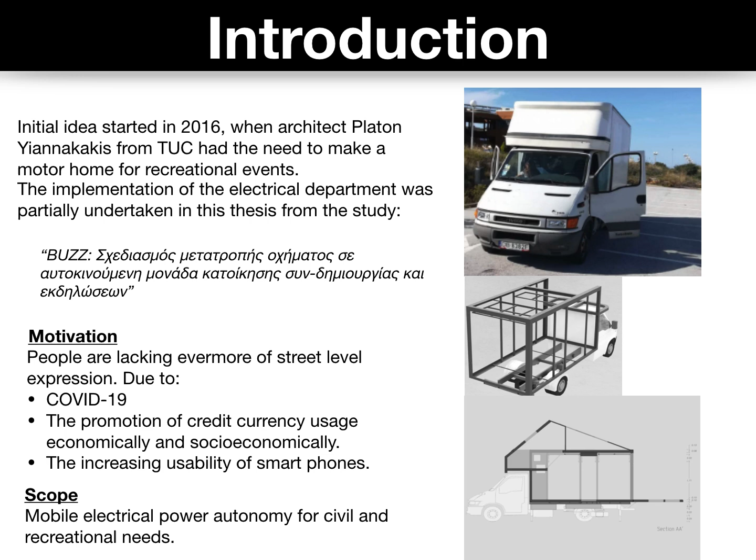Personally, relating to this project, I've been motivated finding a solution to counter-battle the lack of street-level expression, drastically starting from the epidemic of COVID-19. Other factors have contributed to this diminishing human aspect, such as credit card usage affecting economically and socioeconomically, and the broad use of smartphones, to name a few key points. The scope of this thesis is the mobile electrical power autonomy for civil recreational needs.

So a few words of the components being used in the power system. Photovoltaics, also known as solar or photovoltaic panels, all consist of solar cells. Photovoltaics over the years have been developed based on user needs and can be categorized into 2 types based on their usage, residential and commercial. Here you can see some distinct physical characteristics of both. There are 3 main types of solar panels: monocrystalline, polycrystalline, and thin film, each categorized with common attributes.

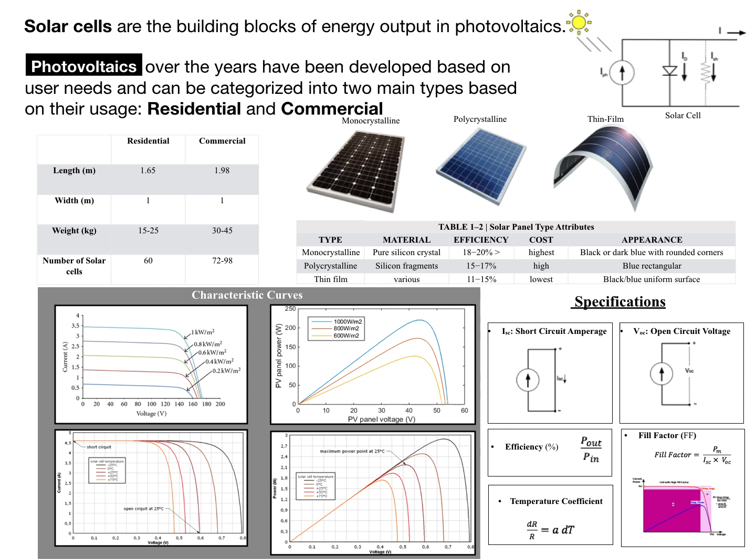The characteristic curve of solar panels shows all the possible combinations of current and voltage for energy production. The temperature exposure also affects the power production, thus the graph. Here are some common picked off a variety of data sheets. So alternators now are mechanical devices that convert circular motion to electricity. In automobiles, they are placed near engines, crankshaft connected via drive belt. The part that comes in contact with the drive belt to spin is called the pulley.

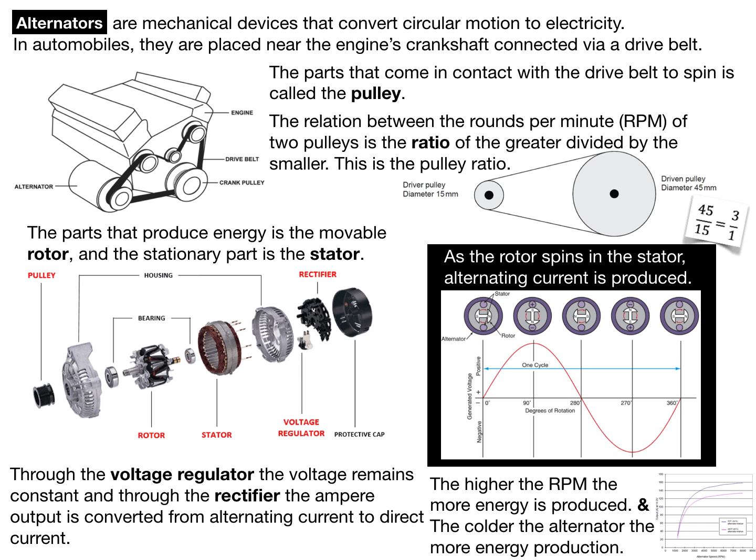The relation between the rounds per minute of 2 pulleys is the ratio of the greater one divided by the smaller. This is called the pulley ratio. The parts that produce energy are the movable rotor and the stationary stator. Through the voltage regulator, the voltage remains constant, and through the rectifier, the ampere output is converted from alternating current to direct current. The higher the RPM, the more energy is produced, and the lower the temperature of the alternator, the more energy is produced as well.

Now, batteries contain chemicals, and energy is created and stored through their reactions. There are 2 types of batteries, which are the primary, used only once, and the secondary, which are used multiple times because they can recharge. Batteries are laid out in cells which consist of a module, and many modules create a pack. The basic structure of a battery consists of a positive and negative terminal dipped into an electrolyte. Both terminals can also be named cathode and anode respectively. When a battery is charged, current flows from the positive to the negative terminal and the opposite when discharging.

Basic conditional parameters are the state of charge, the depth of discharge, and the capacity of the battery, which varies depending on the discharge rate. The lower the discharge rate, the more adequately acid can be supplied to the plates during discharge reaction depending on the depth of discharge. Other parameters include temperature and the number of cycles out of its lifetime.

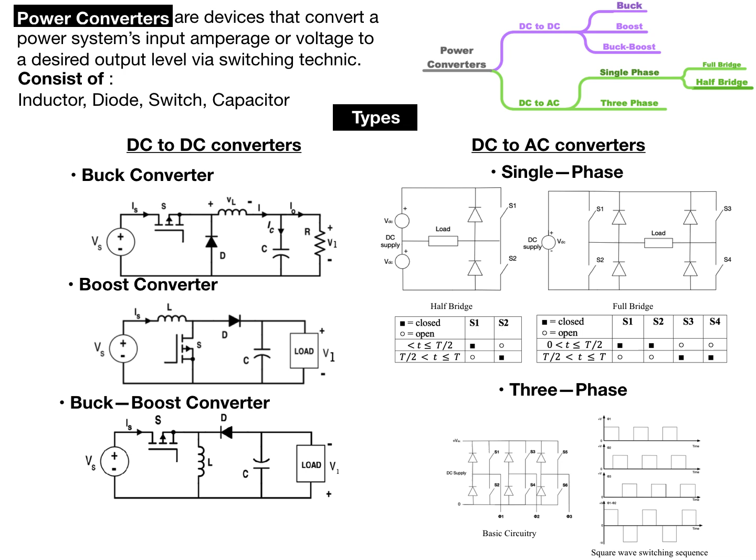Single phase inverters are designed in half bridge and full bridge, with the latter activating a pair of switches. At higher power levels, a three-phase inverter is used. The three pairs of switches are switched in a cyclic manner with a 120-degree phase shift. Now, these are some other common specifications. I'll not go into them, but you can see them here.

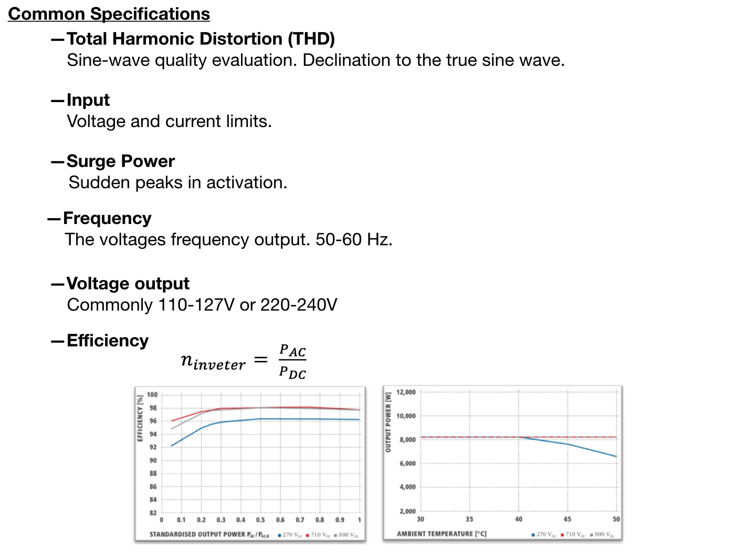The total harmonic distortion is very important because it's a sine wave quality evaluation, and because the implementation also uses sound amplifying devices that could affect the sound quality of the speakers.

The skin effect is an important factor to take into consideration when choosing solid or stranded conductor. When alternating current goes through the conductor, current density gathers around the skin of the conductor, resulting in higher resistance. Stranded wire is affected more by this effect due to more skins.

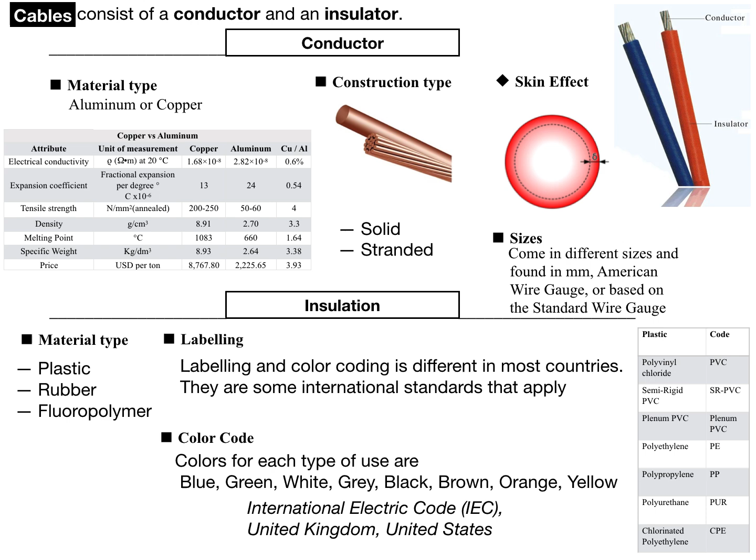Now, insulation can be made out of plastic, rubber, or the fire resistive material fluoropolymer. The outer part of the insulation can be labeled with different initials, and the color can mean either ground, positive, negative, terminal, depending on the standard used.

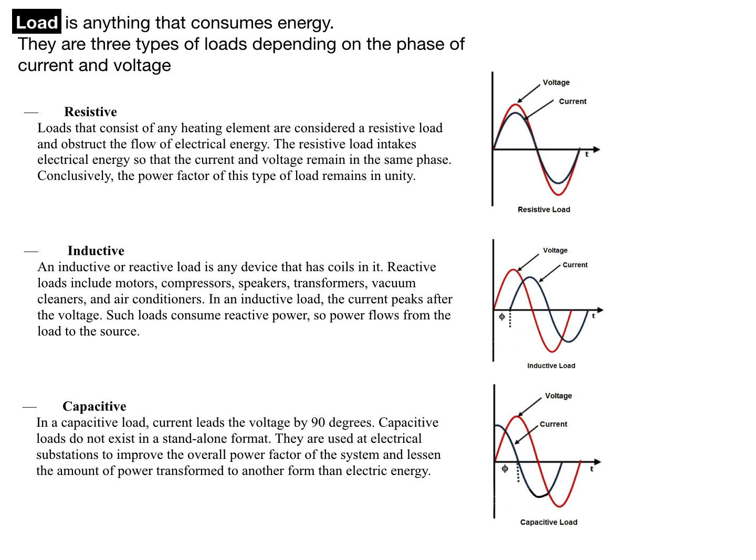Now, the load is considered anything that consumes energy, and there are three types of load: resistive, inductive, capacitive, which differentiate based on the relative phase of the current and voltage. In a resistive load, current and voltage are coherent. In an inductive load, the current and voltage are incoherent. The current follows the voltage. And the opposite happens in capacitive load, which cannot exist in a standalone format.

Now, to the dimensioning of the system, photovoltaics are placed on a 9 square meter roof, and a maximum of 4 panels can fit, except if an extension is created over the roof. The solar panel chosen is the maximum 450 watts by the company SunPower.

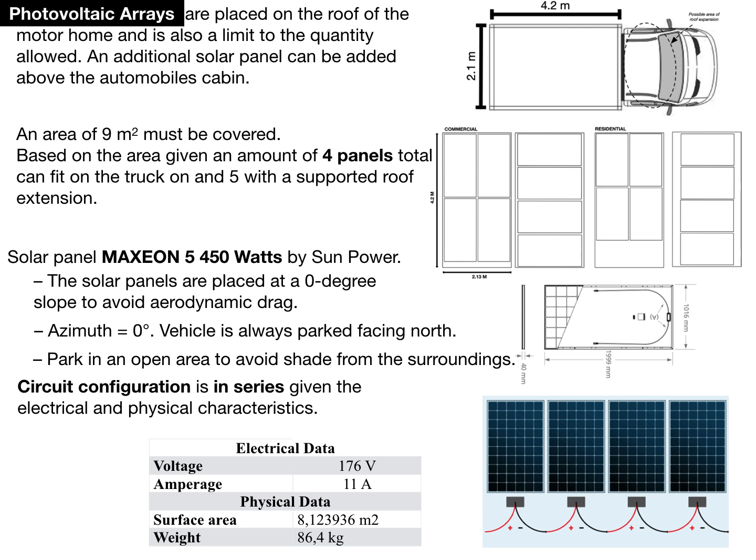Assumptions are made, so the solar panels are placed at a 0-degree slope to avoid aerodynamic drag. Azimuth is 0 degrees, meaning the vehicle is always parked facing north, and the vehicle is parked in an open area to avoid shade from the surroundings. The circuit configuration is in series given the electrical and physical characteristics here, as we can see in the table.

Now, an additional alternator is installed on a mount requiring a longer drive belt and is installed near the engine. The rule of thumb is the size of the alternator must be 20 to 25% of the battery capacity. The current produced cannot exceed the charging current the battery can handle. In this case, having two power sources, the sum of both alternator and solar panel energy production is the limit.

The alternator chosen is 28 volts, 140 amps, and the model is model AAT by a Czech company, as you see.

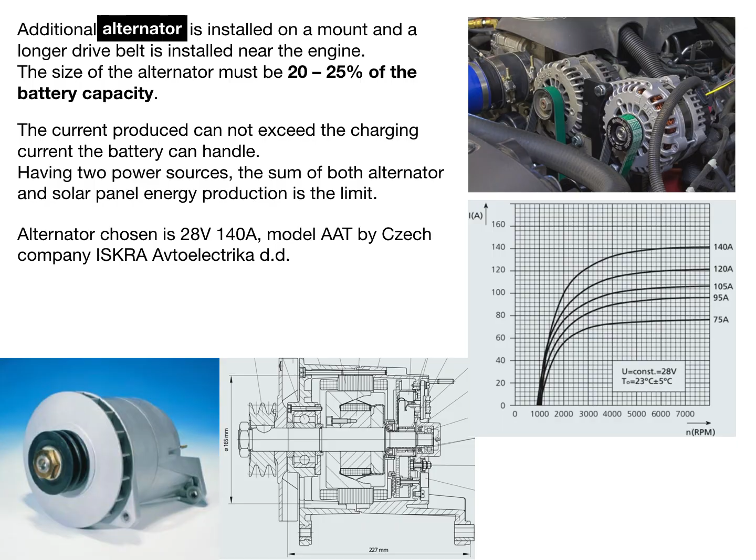There are two loads in the power system, one for household use and the other for recreational use. The household is based on the user's daily routine, and the time activation of each appliance can be estimated, and the overall load is calculated.

Now, the special events load, L2, is based upon a standard live rock/EDM music setup. All sound amplification devices run no more than 1/8 of the nominal power consumption, although it can differ based on the genre of the music. For safety reasons, a quarter of the power consumption is considered, as we see here in the formula.

To sum up, 7,830 watts, rounding up to 9,000 watts, considering a 15% safety margin for load 1, and 6,200 for load 2, considering that the live will run for 3 hours. And that makes it approximately 2,100 watt hours per hour for the live music setup. So times 3, that makes it the number you see at last.

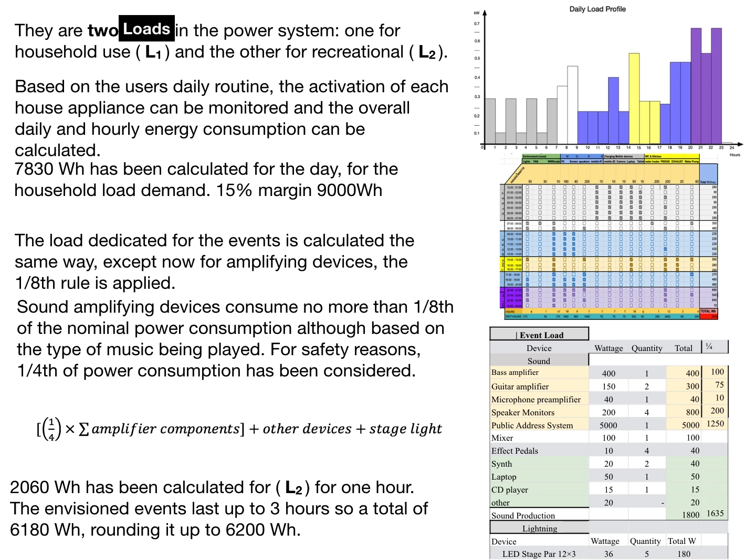There is one inverter for the electrical power system, and the two main parameters to consider are the continuous power and the surge power. Other important factors are the pure sine wave, for the reasons we said before, and low total harmonic distortion. Okay, continuing on.

To size the inverter, the maximum continuous load is calculated in the case all loads are turned on at once. After that, we have to check whether the devices being used have a motor or compressor, such as an air conditioner or a refrigerator, and calculate the surge power, which is usually 1.5 to 2 times the continuous power. Then the apparent power can be calculated by multiplying the continuous power and the power factor, which is commonly 0.8.

So, to sum up, the household load needs an inverter of 1,080 watt hours, and the special events load requires 2,080 watt hours. So we choose the largest one, which is chosen as an indicator for a suitable inverter.

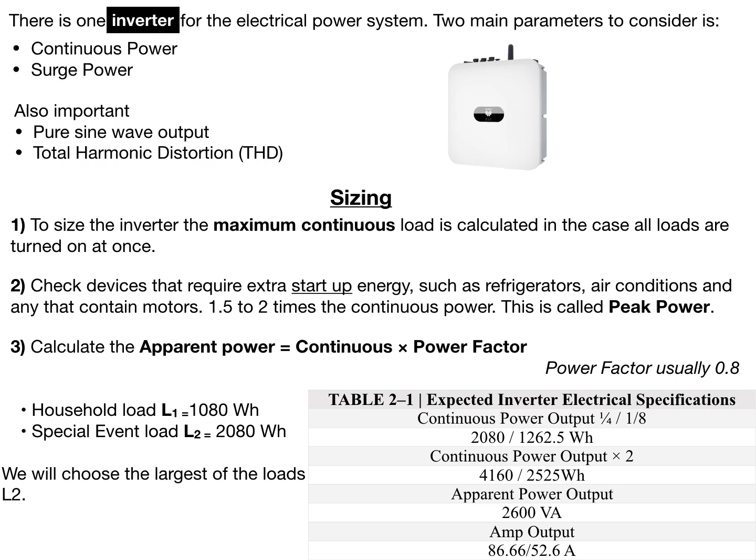Now, 2 batteries, B1 and B2, are used in the study, satisfying each load, L1 and L2 respectively. This formula calculates the capacity for each battery. So we have a rounded 440 ampere hours for battery 1 and 320 ampere hours for battery 2. That equals 2 batteries for the household load connected in parallel and 1 for the special events, using the lithium battery from Renogy, as we see here in the figure.

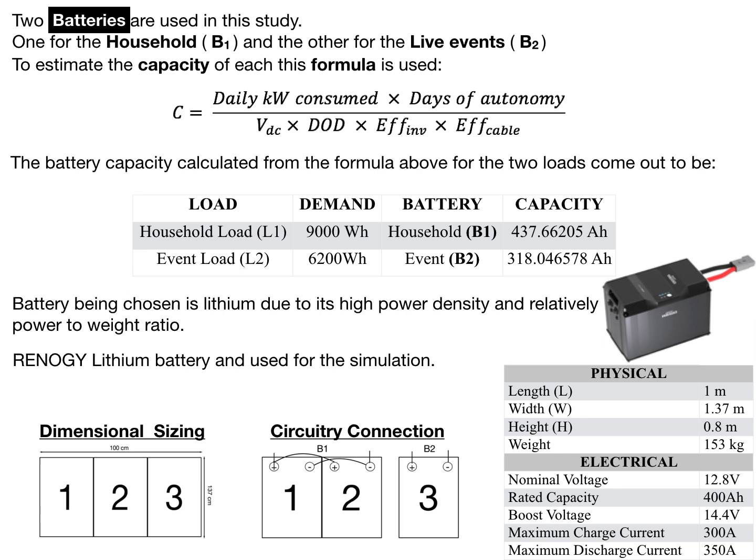Here we see the dimensions of all batteries and the parallel connection of battery 1 and battery 2. The battery selected here is lithium type due to its high power density and power to weight ratio.

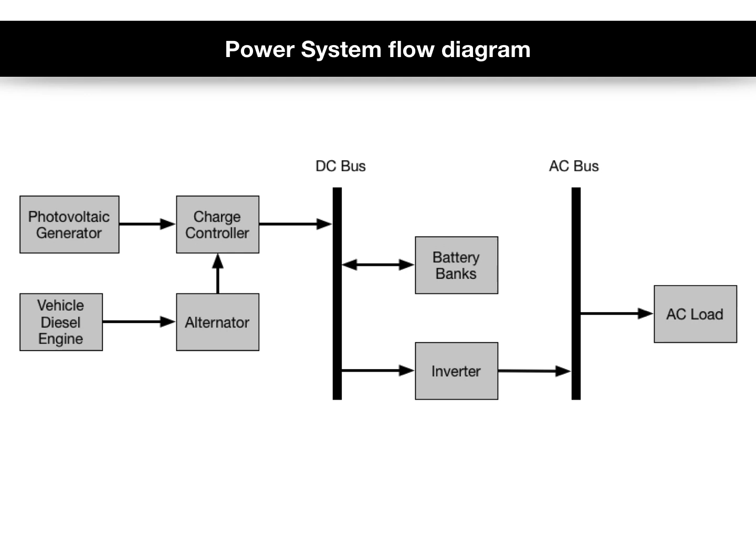Now on to the modeling of the power system. Here we have the power system energy flow diagram emphasizing the connection to the DC and AC buses. Solar panels and alternator are connected in parallel to a standard solar charge controller and then connected to the DC bus. The alternator is driven by the diesel engine. The DC bus outputs energy to the battery banks and the inverter, so the inverter can draw from the 3 power sources at any time, and the AC bus delivers to the loads.

Here we have a more detailed depiction of the power system. Energy enters the system from the sun and the burning of fossil fuel and is transferred to the charge controller to both batteries. The loads are connected to a 230 volt alternating current bus, which is connected to a relay switch controlled by the charge controller.

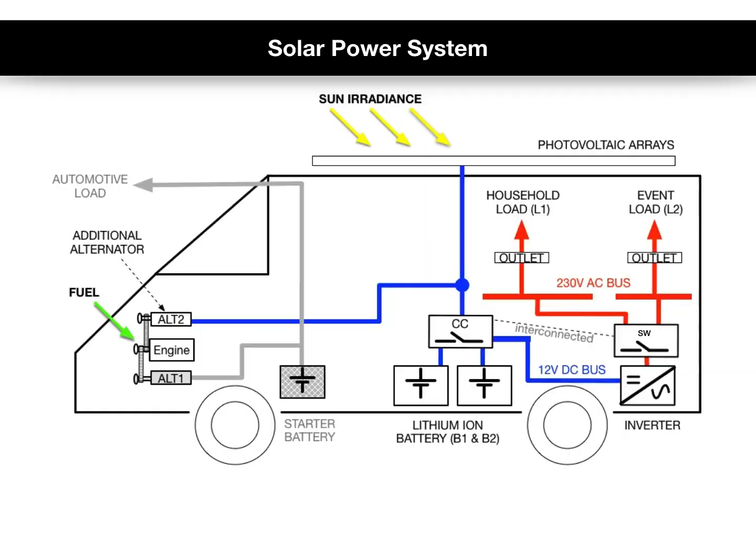The component of the automobile which contributes to the motion of the vehicle is called the powertrain, and the parts examined are engine, transmission, and rear axle. The wheel also plays a role in calculations, but is not analyzed here in depth.

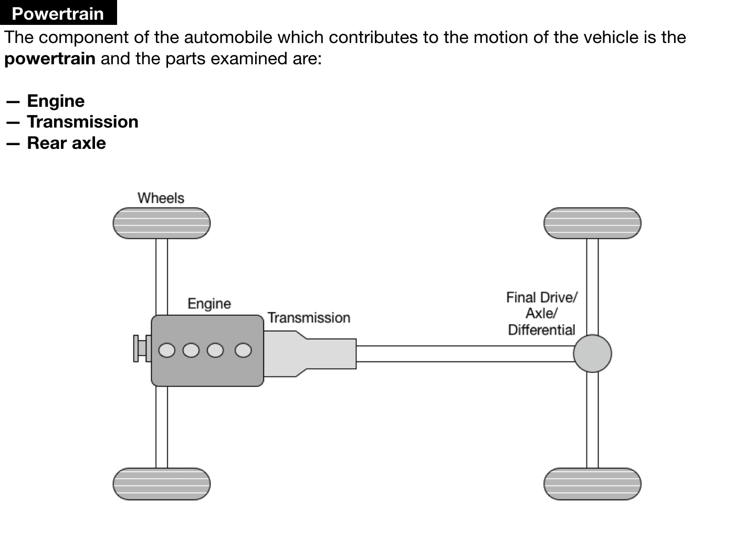The car engine used is called the SOFIM 8140.43. The submodel used is the S, chosen because of its wider range of values in power and brake-specific fuel consumption. The gap between 800 and 1200 RPM is covered using the interpolation method, and all the information is then structured in a lookup table.

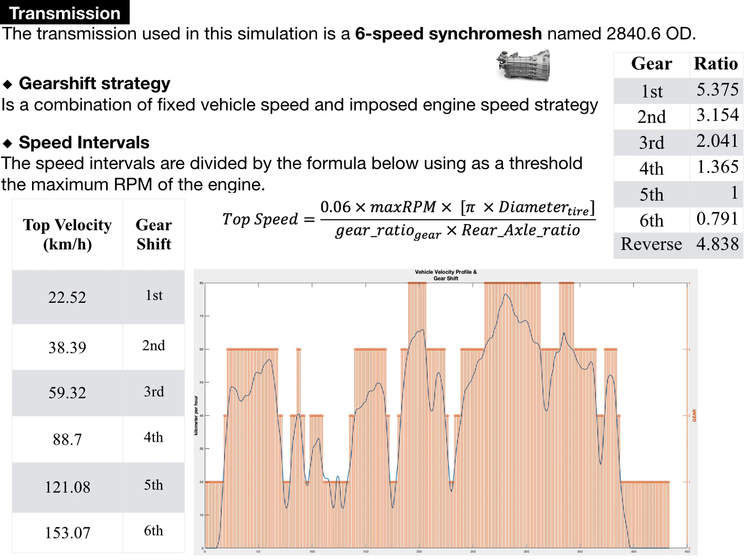Now, the charge controller operates with a clear priority, always ensuring that the household load L1 is satisfied and battery B1 is charged before battery B2 for the live venue.

The charge controller operates with a clear priority, always ensuring that the household load L1 battery B1 is charged before the live venue battery. I'm repeating myself and I excuse myself.

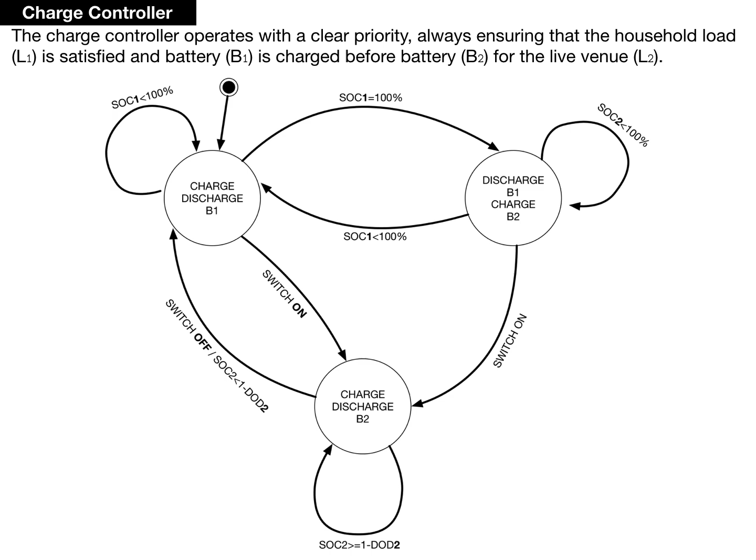This system is made possible by the charge controller's inbuilt programmable microcontroller and relay switch, which monitors the state of charge of B1 and switches the power source to B2 only when B1 is fully charged. When the user switches the relay on manually, the channel opens to battery 2 for discharging also. After B2 discharges to the predefined depth of discharge, the channel returns to its first state with the ability to charge and discharge B1, prioritizing, as I said before, the household use channel.

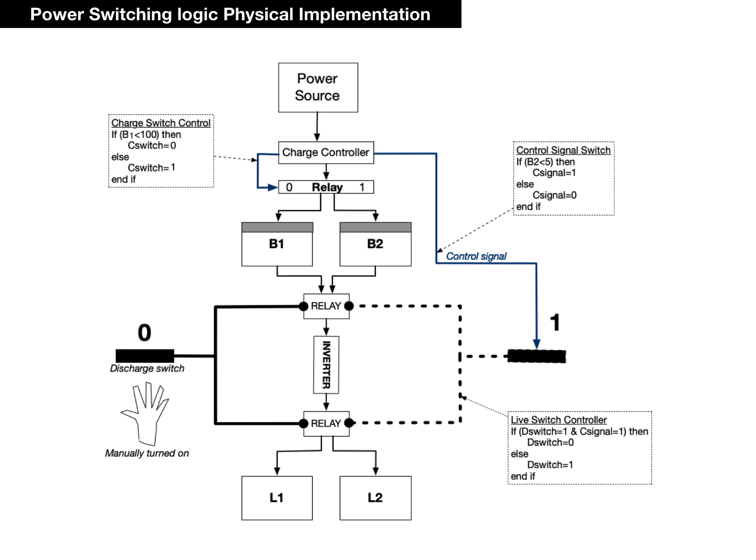So here's a physical implementation with a charge controller and the relay switch, which is manually turned on and turned off electronically. So taking my cursor here, I see. So if B1 is not fully charged, then continue charging or else charge B2. If B2 reaches predefined depth of discharge, then send control signal to turn off switch. If control signal is given and switch is on, then turn off.

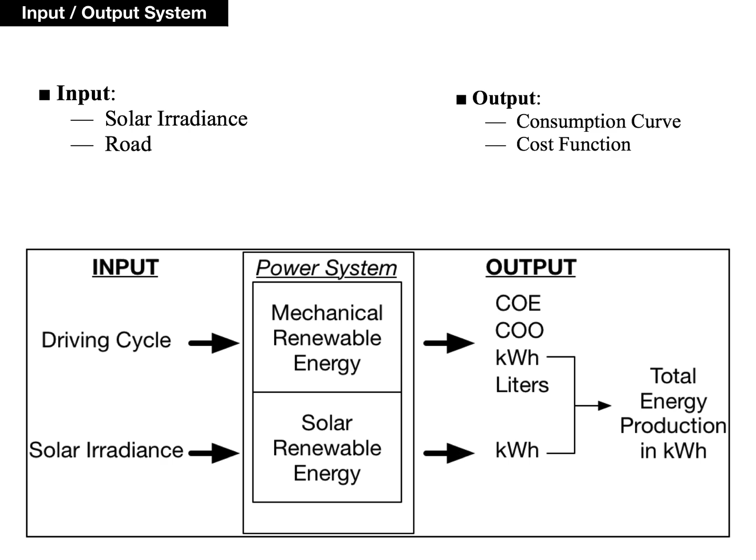Here we have an abstract model of the system's input and output. The input is the solar irradiance and the road. Output is the consumption curve, cost functions, and kilowatt hour production.

Here we have the solar irradiance taken from the National Renewable Energy Laboratory located here in the United States, and road here in particular, as we see, is the Worldwide Harmonized Light Vehicle Test Procedure, abbreviated WLTP, which is a global standard for measuring a vehicle's fuel efficiency, emissions, and range.

Now, the output is a formula used to convert the brake-specific fuel consumption graph to liter per hour. And here we have different economic values such as cost of operation, cost of energy, and solar power production. So on to the simulation now, which is subdivided into evaluation, scenarios, and the results.

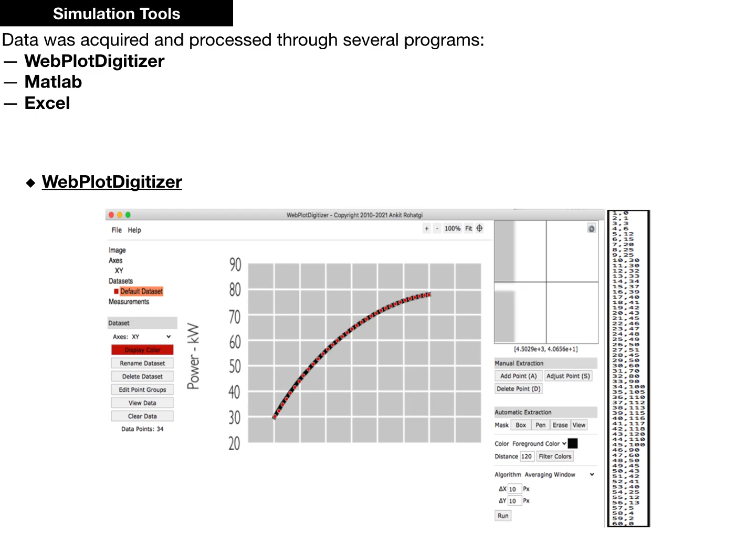So the simulation tool: data was acquired and processed through several programs. The first in line is the WebPlotDigitizer, where all the data sheet graphs are inserted into the program, which recognizes the graph and samples it at a rate chosen by the user. The other program used is MATLAB, where a series of algorithms process the data from the engine and the alternator and compute the desired outputs.

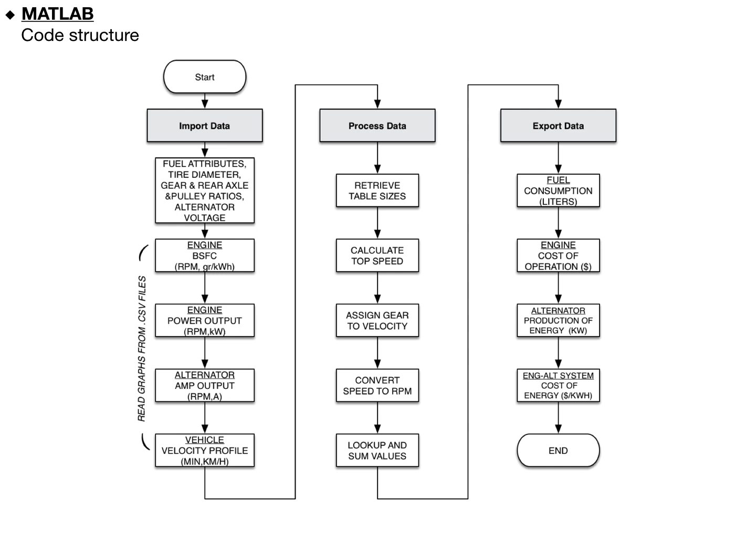The first stage is to import data in the form of CSV files for the alternator, engine, and vehicle in general. Then the data is processed through conversions, formulas, and sum-ups. Last, the data is exported into desired outputs. So here we have the algorithms. I won't go into depth on that. They're relatively simple.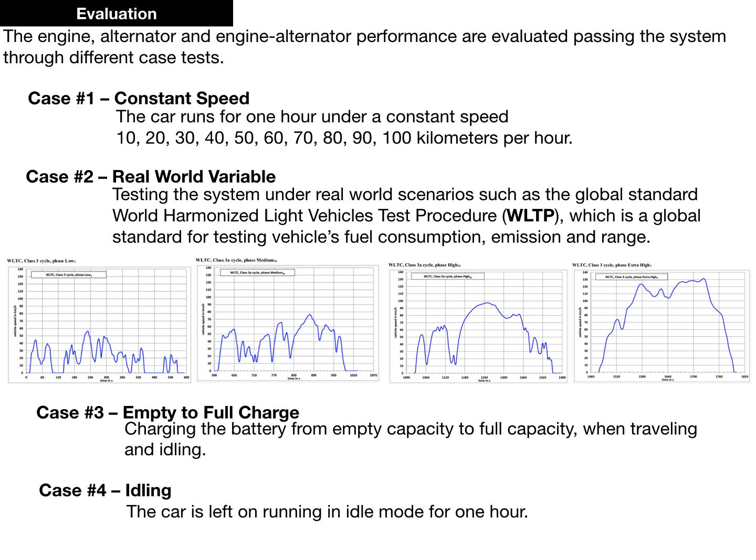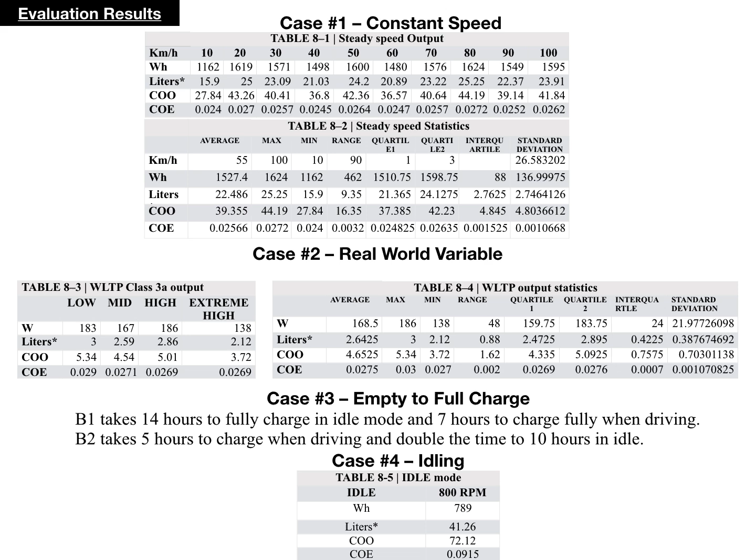So here we are onto the evaluation. We have taken different cases here to evaluate the performance of the alternator, the engine, and the alternator engine. Okay. So here are the results. I'll just move on for now.

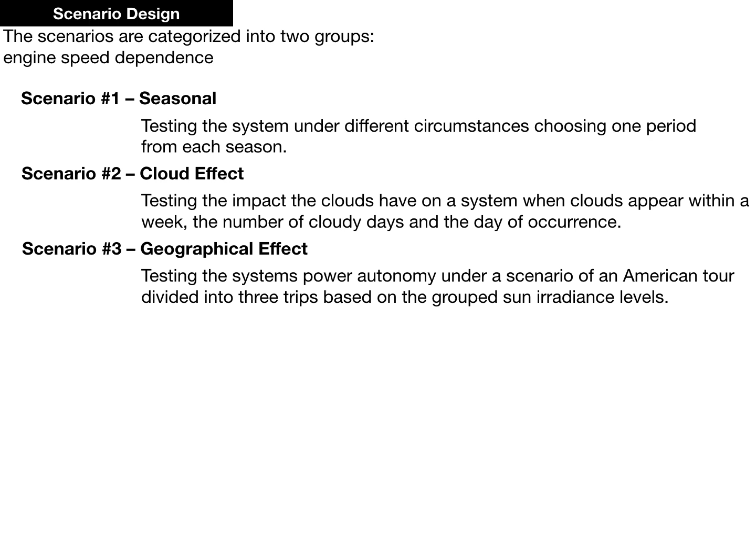So this is the scenario design. We have taken 3 scenarios, and I must mention that I'm not going into depth. We have 3 scenarios: seasonal, cloud effect, and geographical effect. For the seasonal effect, the energy production in number 1 is reduced by 24%, with summer having the highest yield of energy. And this is how it's divided.

So based on trial and error, the following measurements have been taken. We have the cloud effect. So a few words on that. I'll go on and say the autonomy is examined solely on solar power, and then the use of the alternator engine to compensate the unsatisfied hours.

In wintertime, when the weather is coldest, the energy autonomy lasts up to a day. To maintain it, the user must travel every other day to recharge the household. In the fall, the autonomy lasts for 2 days, and in the case of cloudy weather, the autonomy is reduced to 1.3 days, which is a 35% reduction of autonomy.

In spring, the average autonomy time is 5 days. If all 7 days are cloudy, the power system autonomy is reduced by 2 days, which is a 40% reduction. In the summer, the power system is completely autonomous, even when there are clouds all week. So that was just the seasonal effect examined.

Now the scenario examining the cloud effect has been examined in 2 ways: the number of cloud days of the week, observing a 3 to 4% reduction in energy production. And another factor examined is the day of the cloud day occurrence. The day that the clouds occur affects the number of overload hours, which are basically the unsatisfied hours.

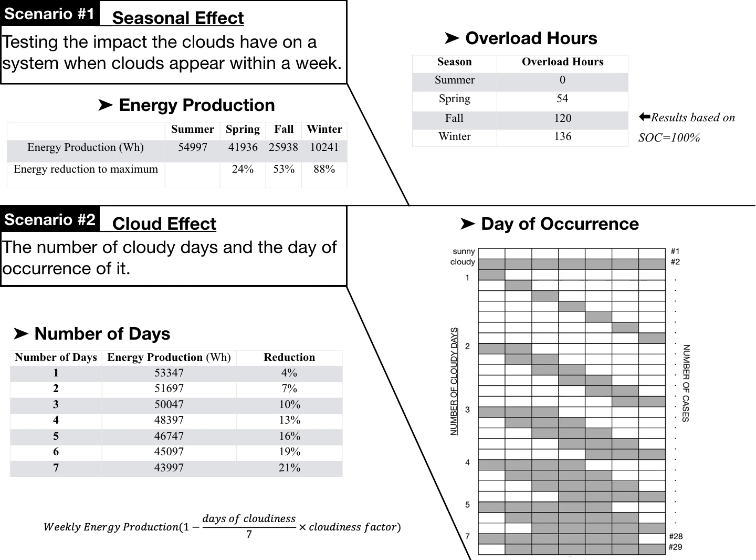So this is the full scenario based on the initial idea of mobile energy autonomy for living and co-creating. In particular, testing the system's power autonomy under a scenario of an American tour divided into 3 trips based on the grouped sun irradiance levels. Driving between stops is around 4 hours, so from one stop to another there are 4 hours of continuous drive, taking into consideration the legal limits.

Drive hours are more preferable because you could drive and do some jobs around the particular area where the car has parked. So this is a balance of a person turning on the engine to satisfy his load. This is a total of 10 weeks. So in each stop, he stays there for a week and tries to satisfy the load either by driving or leaving the car idling.

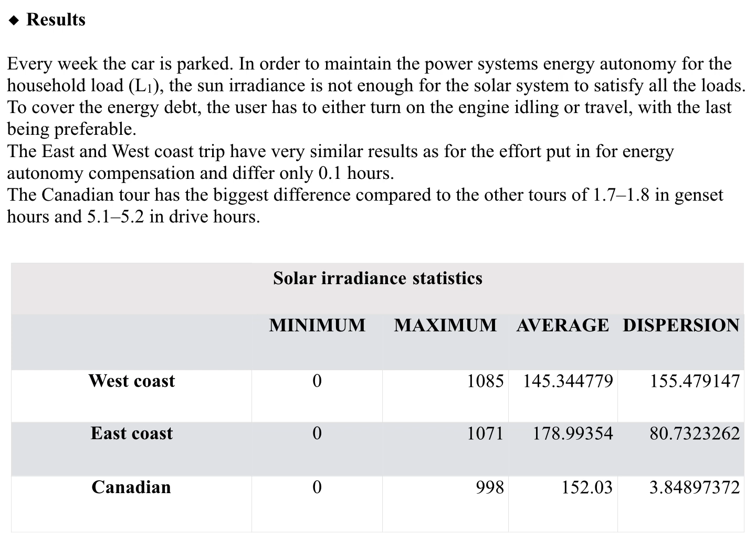And here are the conclusions to finish this off. By examining the power system, putting it to the test, and analyzing the results, conclusions can be drawn for the power economy. All the values are proportional to the speed of the vehicle, which determines the gear, and therefore the engine RPM, the alternator RPM ratio, and the energy production. There is no constant energy production of the alternator.

Every velocity, excuse me, one moment. I'll take my cursor and put it so I can see.

Yes, thank you. So again, there is no constant energy production of the alternator. Every velocity the automobile reaches has a significant impact on the energy production. The alternator charges approximately twice the energy when the car is moving than when idling. A 20% reduction in solar irradiance due to clouds decreases energy autonomy by approximately 40%. The cloudy days of the week do affect the number of overload hours.

The first and second days of occurrence are cloudy. Happening later in the day will reduce the number of overloads. The increase in photovoltaic efficiency does not greatly impact the overload hours. There is no significant difference between the East and West Coast tour.